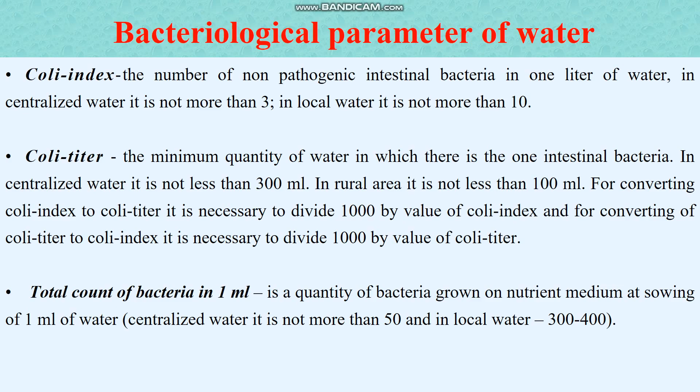A long time ago, the correlation between morbidity of population and water factor was observed by people. Especially, the water factor has an important role in spreading acute enteric infection and invasion. Epidemic, from Greek language meaning general disease, is a category of intensity of the epidemic process characterized by the rate of certain infectious disease morbidity, which exceeds the usually registered rate in the given territory for a certain period of time.

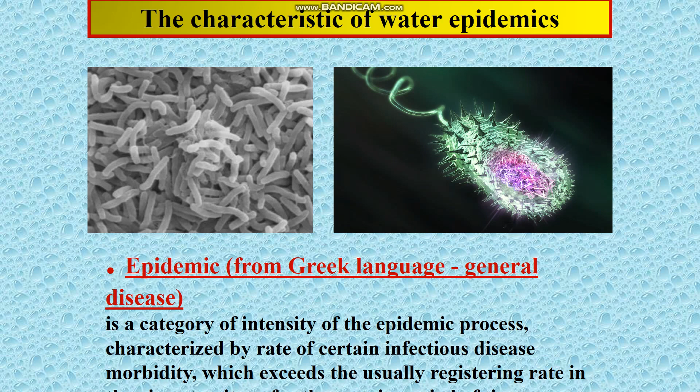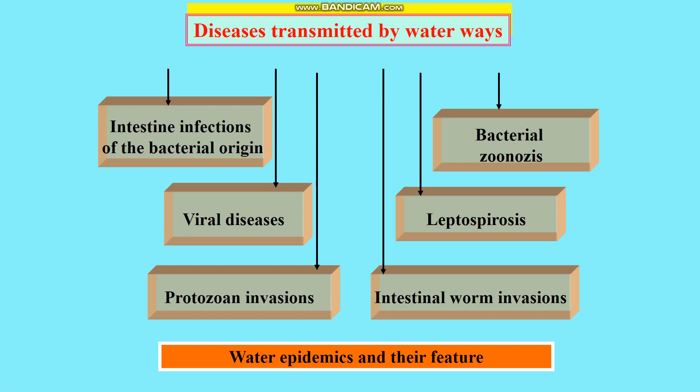Next slide includes information about the main diseases transmitted by water: intestinal infection of bacterial origin, viral infection, protozoal infection, leptospirosis (a very dangerous disease), cholera, bacterial zoonosis, and others.

Main symptoms of water epidemic: simultaneous appearance of a large number of infected people, a jump in population morbidity, so-called epidemic outburst. People who use the same water source, the same pipeline or water supply network, the same water pump or shaft, will suffer from disease. The morbidity level will stay high for a long period of time depending on the extent of water contamination and consumption.

Next symptom of water epidemic: after taking anti-epidemic measures, liquidation of the contamination source, disinfection of the water supply network, and sanitation of the well, the outburst fades away and morbidity goes down drastically. Still, for some time morbidity remains above the sporadic level, the so-called epidemic tail.

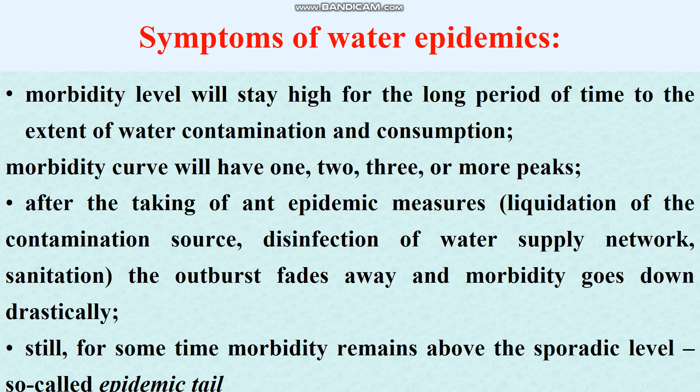This is caused by the appearance of a large amount of new potential sources of infection - sick people and infection carriers - during the epidemic outburst, and activation of other ways of pathogenic microorganism spreading from this source: domestic contact, through dirty hands, dishes, children's toys, personal hygiene articles, through food, or by living carriers like flies.

A very dangerous disease spreading by water is cholera. The endemic center of cholera now is the area of the Ganges and Brahmaputra rivers in India and Pakistan. For the last 10 years, the mortality from cholera has considerably decreased because the Asian cholera is gradually forced out by cholera caused by biotype El Tor and the Vibrio El Tor.

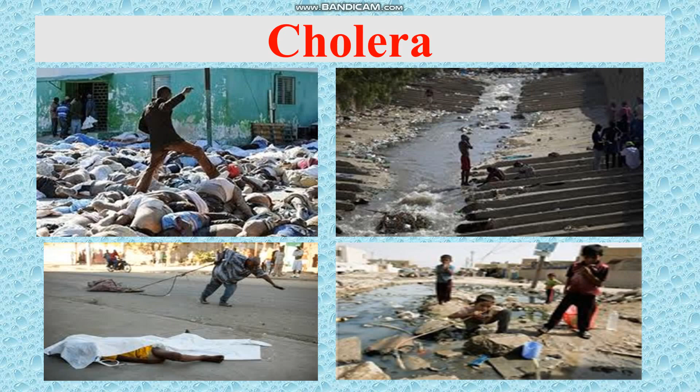The Vibrio El Tor causes the less severe clinical form of disease, but is kept longer in the environment and increases the epidemic risk. Cholera prevalence last year was caused by incomplete organization of water supply, infringement of the international quarantine standard, intensive migration of people, cholera vibrio carriage, a healthy carriage of biotype El Tor from 9.5 up to 25%, and also rapid transportation of polluted products and water by air and water transport.

The water factor in disease spreading is especially characteristic for typhoid. The typhoid bacteria keeps in flowing water up to 7-10 days, in wells up to 1 month and more, in silt up to 2 months. Before centralized water supply implementation, water epidemics of typhoid were usual for European and American cities. The big water epidemic of typhoid took place in Rostov, Russia, in 1927 as a result of sewer drain damage and sewage getting into the water supply system, and in Krasnodar in 1928.

Paratyphoid water epidemics as independent epidemics happen extremely seldom and usually accompany typhoid epidemics. For a long time it was considered that dysentery is spread exclusively by alimentary, nutritional, or contact ways. However, a considerable number of dysentery epidemics were registered after use of poor quality drinking water. There are large epidemics of bacillary dysentery registered in the USA, 1926, and Japan, 1937. Episodes of dysentery are a result of damage of the water purifying system, pollution of wells by flood water, and ingress of sewage into the water supply system.

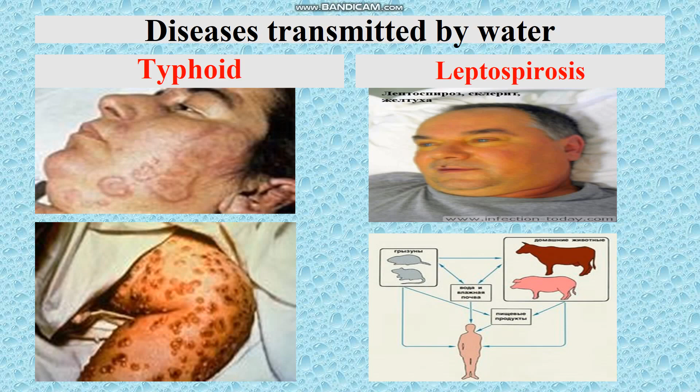As water infections, icteric and anicteric leptospirosis and tularemia are considered. Icteric leptospirosis occurs worldwide, especially in East and Southeast Asia. People usually catch this infection as a result of swimming in polluted water reservoirs or contact with polluted water during summer field work. Moreover, drinking water epidemics of leptospirosis are also known. Carriers of leptospirosis are rodents, 38.9%, pigs, dogs, 26.6%, and cattle, 2.3%. The epidemic episodes fall into the summer-autumn season, a period of frequent contact of people with polluted water.

Drinking and swimming water can be a source of spreading of the majority of virus infections. Observational series about the role of the water factor in spreading of poliomyelitis and other enterovirus and adenovirus infections show that the main reservoir of enteric viruses in the environment is feces and household sewage infected by them. The risk of virus transmission by water is most perceptible in the example of infectious hepatitis, hepatitis A. There are 1.5 million cases of clinical hepatitis A every year. The largest water epidemic of infectious hepatitis was registered in 1955-1956 in Delhi, India, and affected nearly 29,000 people. The cause of the epidemic was tap water pollution by sewage.

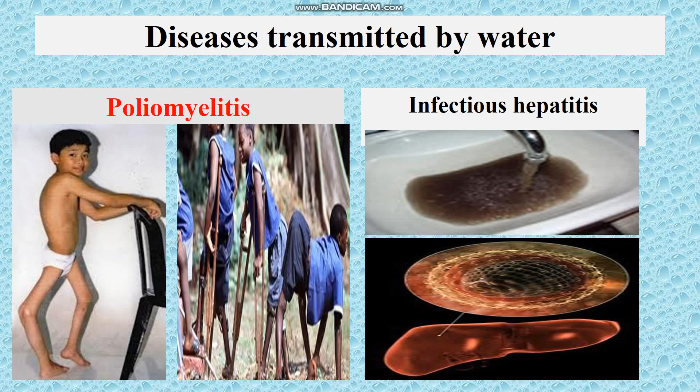Fecal pollution of water is the main cause of amoebiasis transmission. Amoeba was isolated from untreated and treated sewage and from water of surface water reservoirs. In pure water, amoeba cysts keep vitality up to 153 days. Lamblia cysts are also present in water. The carriage of this disease is widely spread all over the world and reaches up to 20% of the population in different countries. Lamblia cysts in water can be a cause of enteric disorders such as lingering diarrhea.

Water has a special role in spreading of helminthiases such as ascariasis, schistosomiasis, and dracunculosis. Schistosomiasis is a disease in which helminths live in the venous system. Their migration with the blood flow to the liver and urinary bladder can cause serious consequences. Usually infection occurs in rice fields or during swimming in shallow water reservoirs, rivers, lakes, whose water is infected by the larval stage of helminths. The larva gets into the human organism through intact skin. Swimmer's itch is a dermal disease. Invasion occurs when swimming in non-circulating water reservoirs where infected snails, the hosts of schistosomes, live. According to World Health Organization data, schistosomiasis is prevalent, and approximately 200 million people all over the world, mainly in Africa, Asia, and Latin America, are affected annually.

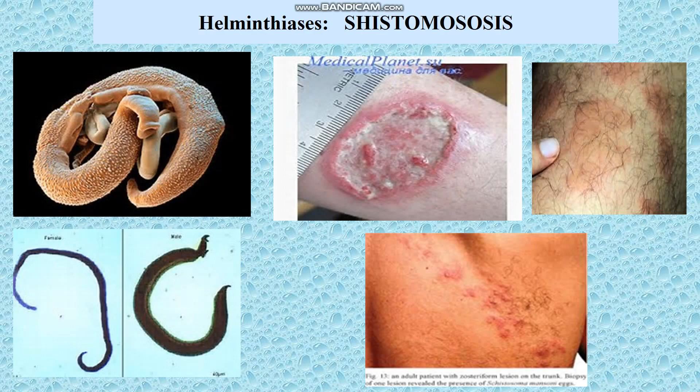In hygienic practice, the following methods are applied for increasing water quality. These methods are divided into two groups. Basic methods include water clearing, discoloration, and disinfection, and then there are special methods. The basic purpose of water treatment is protection of the consumer against pathogenic organisms and impurities which can be dangerous to human health or have unpleasant properties: color, smell, taste. The method of cleaning should be chosen according to the quality and character of the water supply source.

Use of underground interstitial water sources for centralized water supply has a lot of advantages over use of surface sources. Among them: security of water from external pollution, safety in the epidemiological relation, constancy of quality and water discharge. Water discharge is the volume of water coming from a source per unit of time. Usually underground water does not require clarification, discoloration, and disinfection.

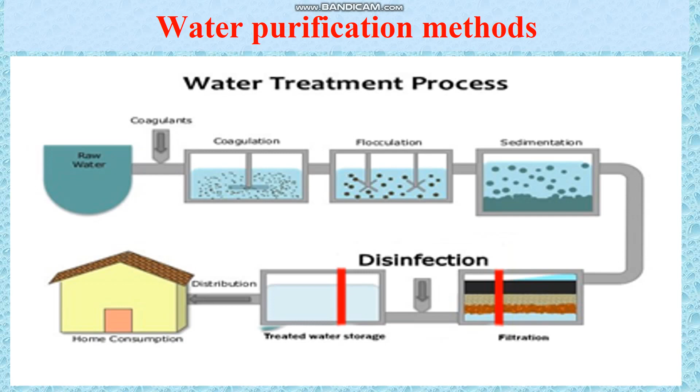A 5% solution of the coagulant is given to the mixer with the help of a special dosator, where it's quickly mixed in. Then the water enters the reaction chamber, where the formation of flocs completes in 10-20 minutes. Such water passes to the settling tank, where the flocs sediment. The size of the settling tank corresponds to settling for 2-3 hours.

According to water direction, horizontal and vertical precipitation tanks are distinguished. The vertical precipitation tanks are used in water works of small productive capacity, because for effective precipitation the water speed there has to be small, about 1 mm/second. The horizontal precipitation tanks are used in water works of large productive capacity. The water speed there is bigger than in vertical tanks, about 2-4 mm/second, and is increased by coagulation up to 6-8 mm/second.

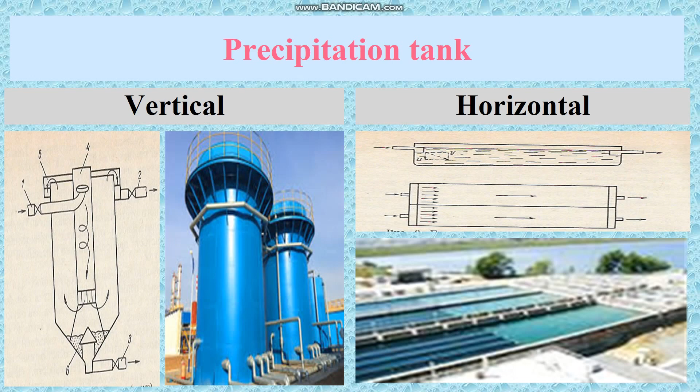The next stage is the removal of finely dispersed suspended matter from water. It's filtration. The essence of filtration is water passing through finely porous material which detains the suspended matter. As the main filter bed, fine sand and gravel are usually used in filters. Filtration is important because 98-99% of bacteria are removed by filtration, apart from other impurities. Filters applied for water filtration: slow sand filter, rapid sand filter, double rapid filter, contact clarifier.

Following are the elements of a slow sand filter or biological filter. Supernatant raw water is present above the sand bed. Its depth varies up to 1.5 meters. It serves two important functions. It serves as a constant supply of water. It provides a waiting period of some hours, and there is partial purification by sedimentation and oxidation.

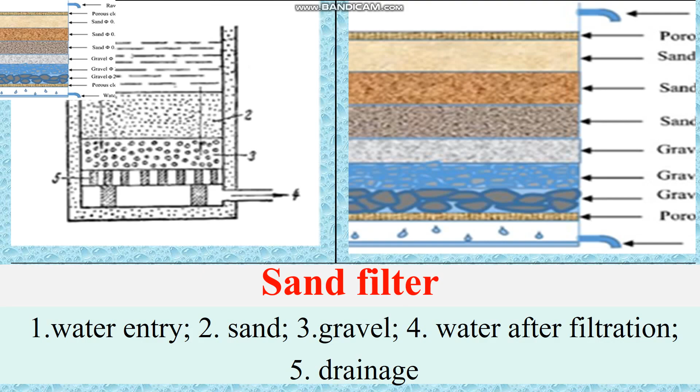The sand bed is the most important part of the filter. Its thickness is about 1.2 meters. The sand grains are of diameter between 0.20 and 0.35 millimeter. The sand bed is supported by a layer of graded gravel. Water percolates through the sand bed very slowly, and during this it is subjected to a number of purification processes: mechanical straining, sedimentation, adsorption, oxidation, and bactericidal action.

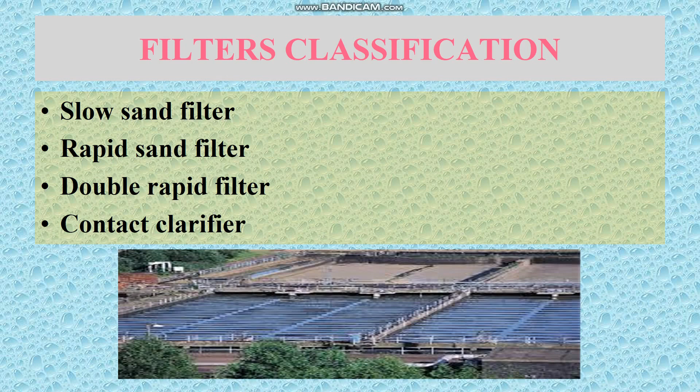Next kind of filter, the double rapid filter. Speed of water 15 meters/hour. Efficiency 75%. They are usually used in big cities. After the double filter, the water needs disinfection. According to the number of filter beds, single layer and double layer filters are distinguished. The clarifier is a kind of rapid filter. It unites at once three processes: coagulation, precipitation, and filtration. Filtration speed is 4-5 meters/hour.

Today, very new modern filters are applied at water sources. This is the newest technology of water purification by track membrane. This purifying system is a full analog of a living organism's cell membrane. The track membrane has the same micropores, and all water pollutants with size more than 0.2 micrometer are detained on its surface.

Track membrane is made of polymeric films with a thickness of 23 microns by bombarding them with high energy krypton ions that pierce the film all the way through. Destroyed material channels, tracks, are created at the places of separate ions. This material differs from the unpierced one in its physical and chemical properties. Strictly equal through holes of cylindrical shape form in place of the tracks when etching the film in an alkaline solution. A particle accelerator is used for the mass production of track membrane.

The main difference between the track membrane and other types of membrane is the high selectivity of the former. All single pores have the same exact diameter with maximum 5% deviation. That is why, depending on the functional purpose, filtration of mechanical admixture, bacterial or virus substance, the corresponding rating of track membrane can be chosen, which would be optimal for the certain process of microfiltration.

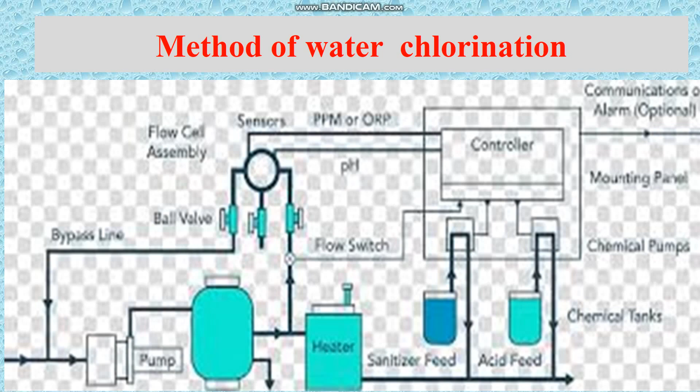According to sanitary norms and rules, the dose of chlorine should be such that after disinfection the water contains 0.3–0.5 mg/liter of free residual chlorine. This amount, not worsening the taste of water and not being unhealthy, testifies to reliability of disinfection. The amount of active chlorine in milligrams necessary to disinfect 1 liter of water is named the chlorine need of water. Besides a correct choice of chlorine dose, a necessary condition of effective disinfection is good mixing of water and sufficient time of contact of water with chlorine: in the summer, not less than 30 minutes; in the winter, not less than 1 hour.

The next methods of chlorination are applied: double chlorination, chlorination with ammonization, and hyperchlorination. Double chlorination provides supply of chlorine on a waterworks twice, first before settling tanks and the second, as usual, after filters. It improves coagulation and decoloration of water, suppresses growth of microflora, including in constructions, and increases reliability of disinfection.

Chlorination with ammonization provides introduction into disinfected water of a solution of ammonia and, in 0.5 to 2 minutes, chlorine. Thus, in water chloramines, monochloramines and dichloramines are formed, which also possess bactericidal action. This method is applied to disinfect water containing phenols, with the purpose of preventing formation of chlorophenols.

The hyperchlorination method provides addition to water of obviously big doses of chlorine, 10-20 mg/liter and more. It allows reducing the time of contact of water with chlorine to 15-20 minutes and receiving reliable disinfection from all kinds of microorganisms: bacteria, viruses, rickettsia, dysenteric amoeba, tuberculosis, and even spores of anthrax. After the end of the disinfection process, there is a big surplus of chlorine in water, and there is a necessity for dechlorination. The hyperchlorination method is applied mainly in expeditions and military conditions.

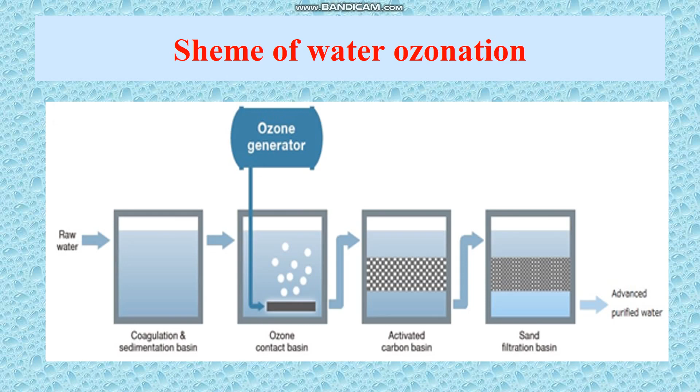The mechanism of bactericidal action of UV irradiation is now explained by breaking of bonds in the enzyme system of a bacterial cell, causing infringement of the microstructure and metabolism of the cell, resulting in its destruction. The dynamics of dying of microflora depend on the dose and the initial content of microorganisms. Efficiency of disinfection is influenced by the degree of turbidity, chromaticity of water and its salt structure. The necessary precondition for reliable disinfection of water by UV beams is its preliminary clarification and decoloration.

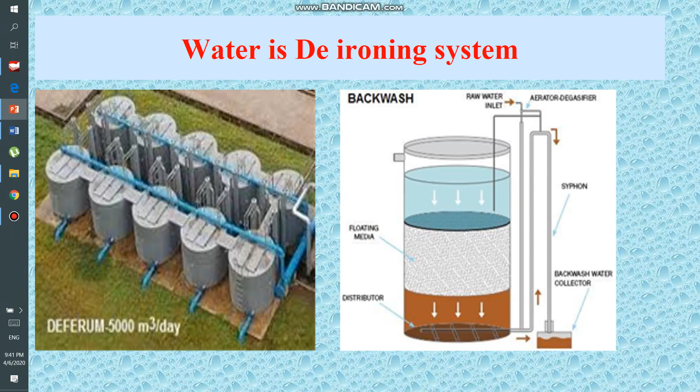Deironing is made by spattering water with the purpose of aeration in special devices, cooling stacks. Thus bivalent iron is oxidized into iron hydrate, which is deposited in a sediment bowl and laid on the filter. Softening of water, the next method, is achieved by filtering through an ion exchange filter loaded with cation resin, cation exchange, or anion resin. Next special method: desalination.

Flash evaporation is the most widely used method of water desalination. The seawater is heated and then pumped into a low pressure tank where the water is partially vaporized. The water vapor is then condensed and removed as pure water. This process is repeated many times. The remaining liquid, called brine, contains a large amount of salt and is removed and often processed for minerals. Note that the incoming seawater is used to cool the condensers in each evaporator.

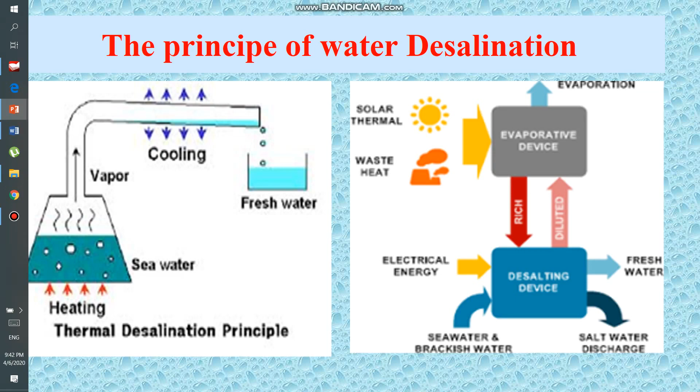This design conserves energy since the heat released when the vapor condenses is used to heat the next batch of seawater. Next special method: decontamination. A decrease in the amount of radioactive substances in water by 70–80% occurs at coagulation, settling and filtering of water. For deeper decontamination, water is filtered through ion exchange resins.

Defluorination method. Defluorination of water is done by filtering through anion exchange filters. Frequently for this purpose activated aluminum oxide is used. Sometimes, to decrease the concentration of fluorine, the water is diluted with water from another source not containing fluorine or containing it in minute quantity. Fluoridation is the artificial addition of fluorine.

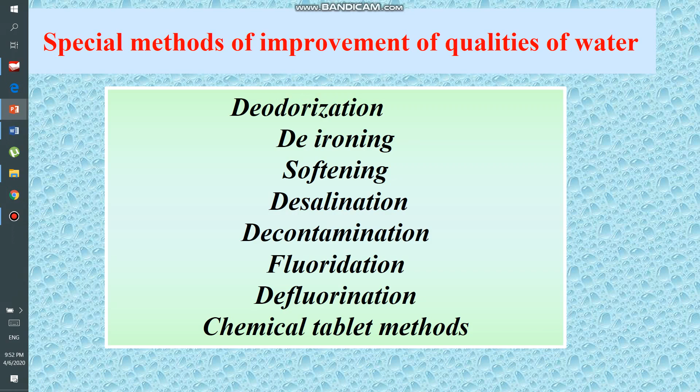It is done when fluorine in water is less than 0.7 mg/liter, with the purpose of preventing caries of teeth. Fluoridation of water reduces caries disease by 50–70%, 2–4 times. Chemical tablet methods. Tablets and solutions are widely used for disinfection on expeditions and hikes. Halazone tablets contain chloramine and are stable during storage. The tablet is introduced to a certain volume of water, usually 1 liter, and stirred every 3–5 minutes. It can be used in 30 minutes, but this tablet may not be enough for very contaminated water.

In these cases you can use the chlor-dechlor tablet, which contains more chlorine and a dechlorinating agent in the middle of the tablet, sodium hyposulfite. They introduce 1 tablet to the water and stir it every 2–3 minutes. After the external part of the tablet dissolves, the central part inactivates the surplus chlorine. If the water is very heavily contaminated, 2–3 tablets are introduced at once.

Iodine-containing preparations are widespread in tropical countries. They disinfect water from bacteria, many viruses and cysts. The simplest method is disinfection by a 10% solution of iodine. 2 drops of such solution are introduced in 1 liter of very contaminated water.